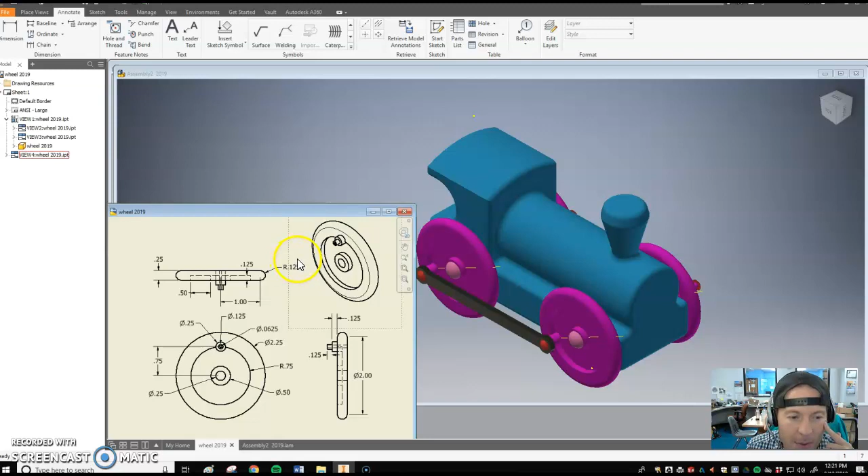So to start off with, if we're looking to build this wheel, we're going to build a new part file. So new, IPT, here we are. Let me slide this over so we can see everything.

All right, the key to this build is we're actually going to build it with a revolution, which we haven't used yet so far. The reason we want to build it with a revolution is to get this nice curved shape - it could potentially be done with a fillet, but it's going to be a lot easier to just build this profile right here, and then we're going to revolve it 360 degrees to make the entire wheel shape.

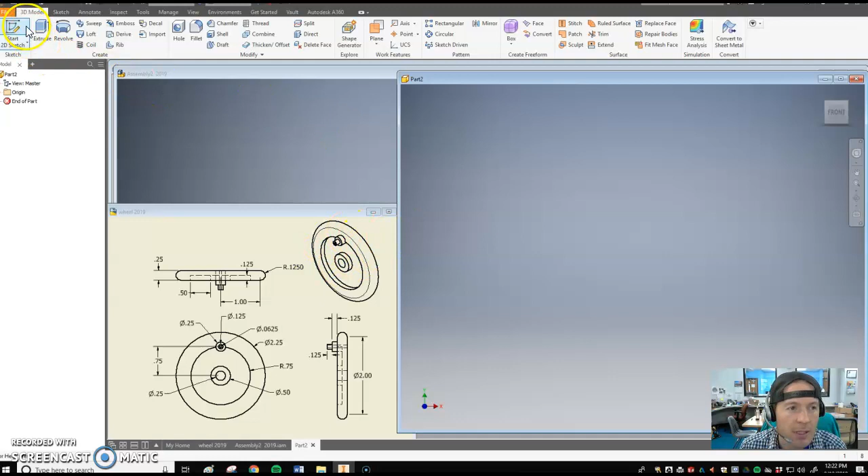So let's dive in. So we're going to start a sketch. It doesn't matter which plane you choose. I'm just choosing one randomly.

So to start off with, I'm building this profile here. Let me throw a rectangle on. Any rectangle - I want to make sure I don't accidentally lock it to anything. That rectangle is just fine.

Now, as I'm building this profile, see there's this little rectangle inside there, so I'm going to start that rectangle, something like that. Of course, we'll throw some dimensions here in a second.

We also have this arc out here, so let me throw that arc on there. With our arc tool, remember you go corner, corner, and something like that. There's the general profile of that.

Now let's start to get some dimensions on here and make this kind of how we want it. To start off with, I see from the center to kind of the top of where that rectangle goes, it's about 1 inch. So let me throw 1 inch on there.

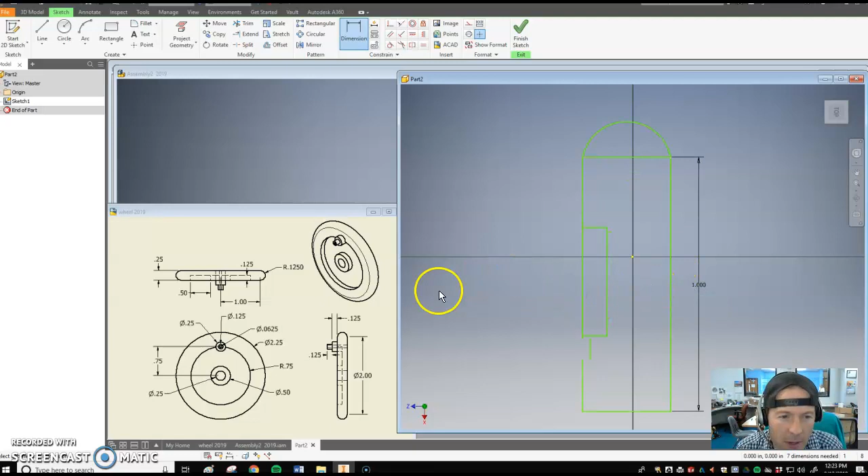Great. Next, as I look over here, I see - where is it? I'm looking at this distance right here. From there to there, it tells me is 0.125 inches. So I'm going to go ahead and throw that in right here. 0.125. So there's that indentation.

Next, as I look over here, I see that there's kind of this cutout here. That's this section here. This dimension tells me that's 1/2 inch. So I'm going to put this dimension to 1/2 inch, 0.5.

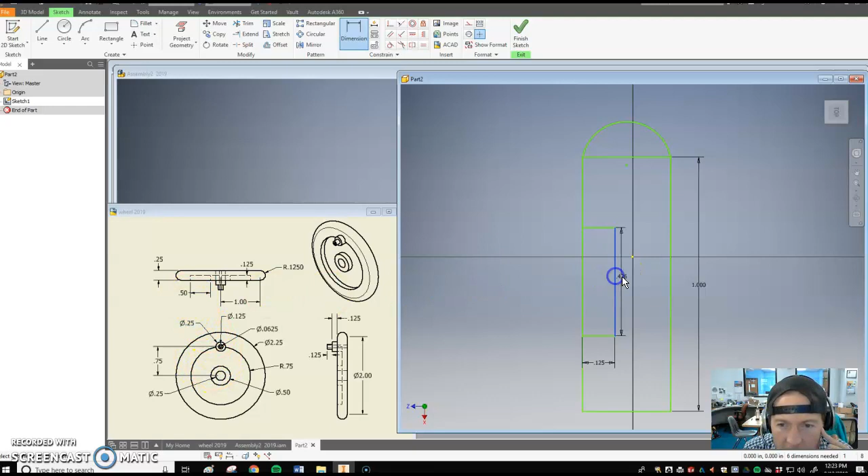All right, starting to look like our profile here. Next, let's figure out what we need this to be. So I look back over here, and here I see that this radius is 0.125. So I'm going to grab this radius, 0.125. All right, that's good.

Next, I want to look at this. How wide does this whole thing need to be? Looking over here, I see the wheel needs to be 1/4 inch. So let me grab this and set that to 1/4 inch.

All right, we've got most of our dimensions. Looks like I just need this one and this one. Let me see if I can figure this out. I'm trying to figure out how far this part needs to be right here. I'm going over here - so it's this outer circle that we're building right there.

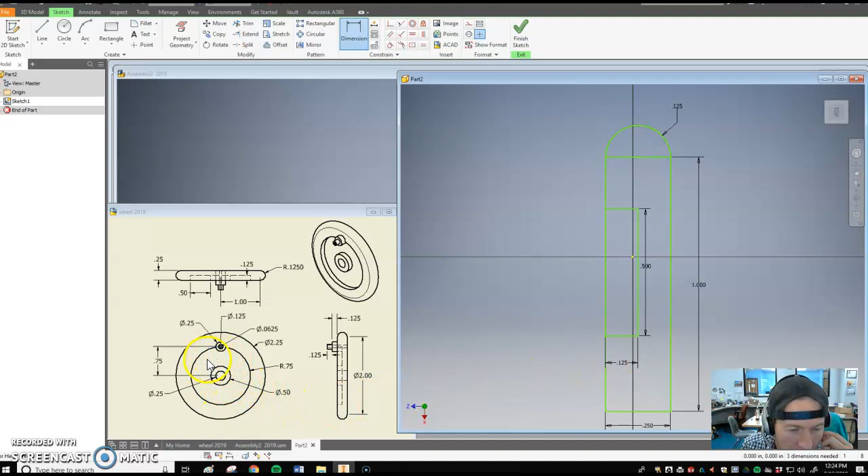Here I see it has a diameter of 1/2 inch. And so if it has a diameter of 1/2 inch, and this is the radius because we're about to revolve this, I need to make this 1/4 inch. So let me grab from here to here. I'm going to change this to be 1/4 inch, 0.25.

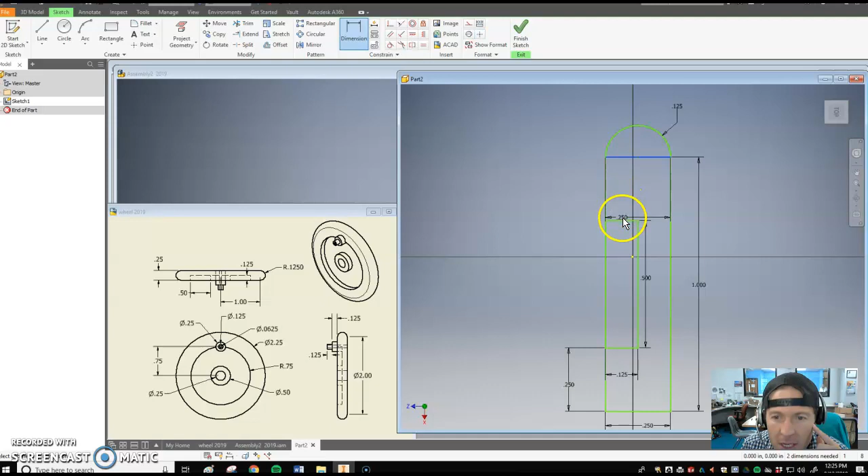And now if this whole thing is 1 inch, this is 1/4 inch, this is 1/2 inch, well then this also needs to be 1/4 inch. And just to make sure everything's right, I'm going to double check that. Okay, here it gave me this message saying it's already 0.25. All right, so here's our profile. We can cut this out, or I think we can cut this out.

It doesn't want me to cut it out. That's fine, we can still revolve it with that in here. Let me finish the sketch. We're going to go up to revolve in our 3D model.

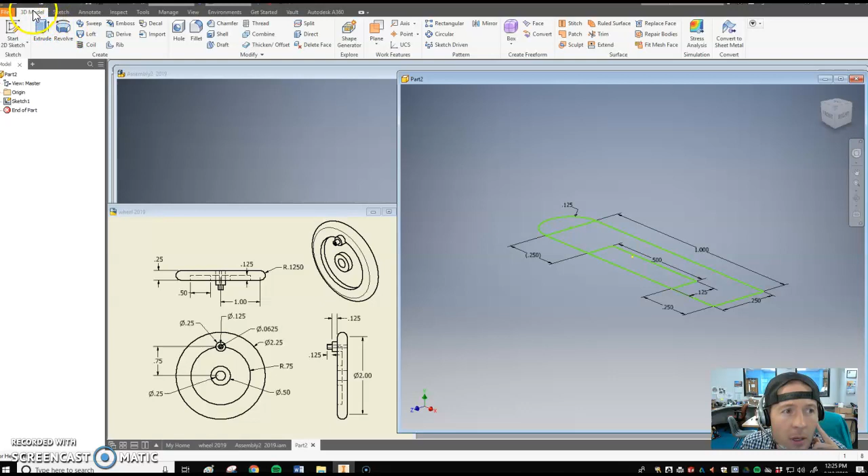Revolve. Select the profile you want. I want this whole profile, that's everything I want selected. Now I have to tell it what axis to revolve around, so I select axis, and we want to revolve it here. This is the center. There's my preview, that looks like I want it to. I'm going to hit OK.

We can pull in the view cube and get a nice look at it. That's the start of this piece here. Next, let's focus on putting a hole right in the center. So that's this hole right here. I can see it doesn't come out, it's just this hole here. And that hole looks to have a diameter of 0.25.

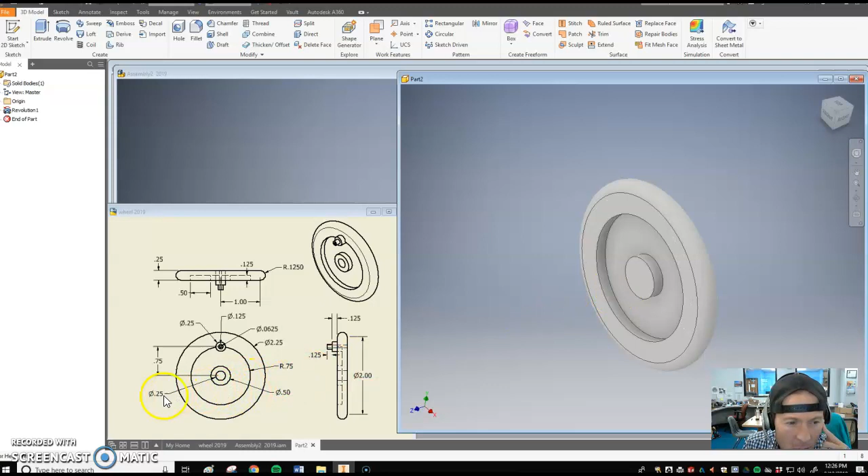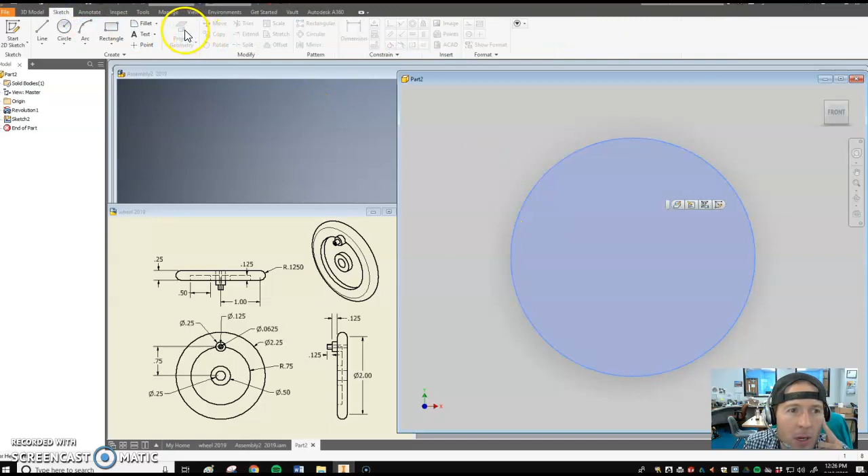So let's throw this hole in here, and we get a nice front view. To do this, we're going to build a point there. It moved me over, so I just pushed on the wheel and dragged it back. I'm going to throw a sketch right here. Now I want to know the exact center point. To get the exact center point, we can use this tool called Project Geometry. Okay, now we're in a sketch.

Now I'm going to use Project Geometry and click on the circle. Notice it highlights that point for me. So I'm going to grab the point tool and make that point. That's all we need to do for the sketch. Now let me go to 3D model and tell it we need a hole right there.

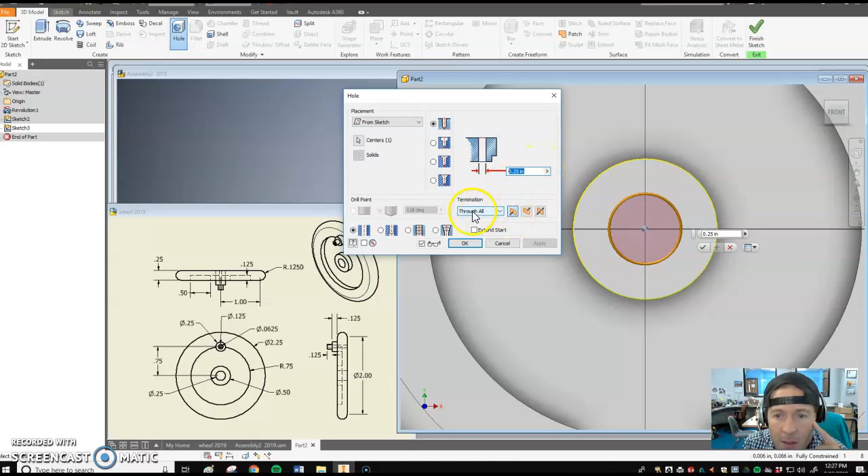So a second ago we said we wanted this hole to have a diameter of 0.25. So let's type that in - oh great, it's already set. I want it to go all the way through our wheel, so that's okay. All right, let's zoom out and see how things are looking.

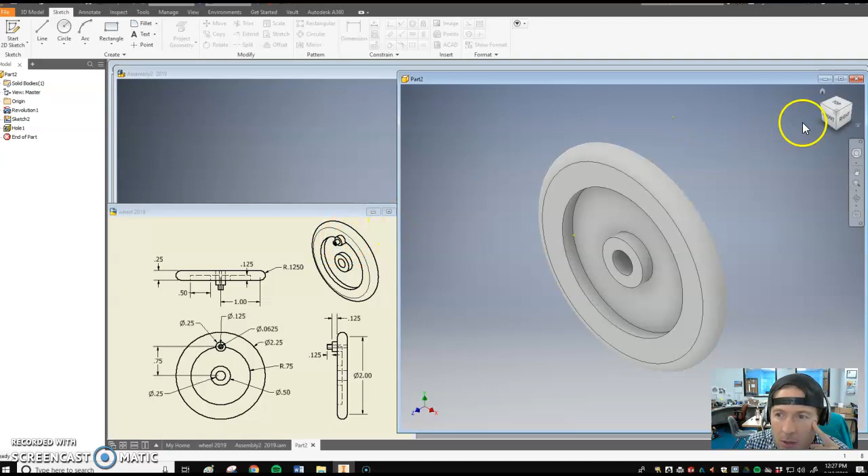Great, so now we see we have our full wheel. Let me go back to a nice view just by clicking the home button here. Next, I want to focus on this peg out here, that's where our linkage arm is going to attach to. So let me get a nice front view and zoom in a little bit. I want to throw this section right up here, so let's start another sketch.

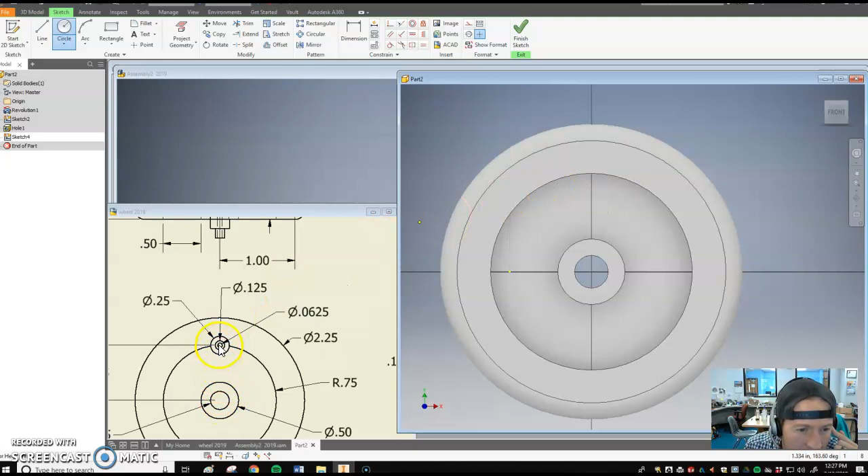Select our surface, we want it right here. Circle. Now as I look down here, we see that the center of this new circle is 0.75 from the center here. So I want to build this right here, and I'm just going to pull it out. We'll set some dimensions here in a second. As I look down here, I see the diameter of this piece looks to be 0.25.

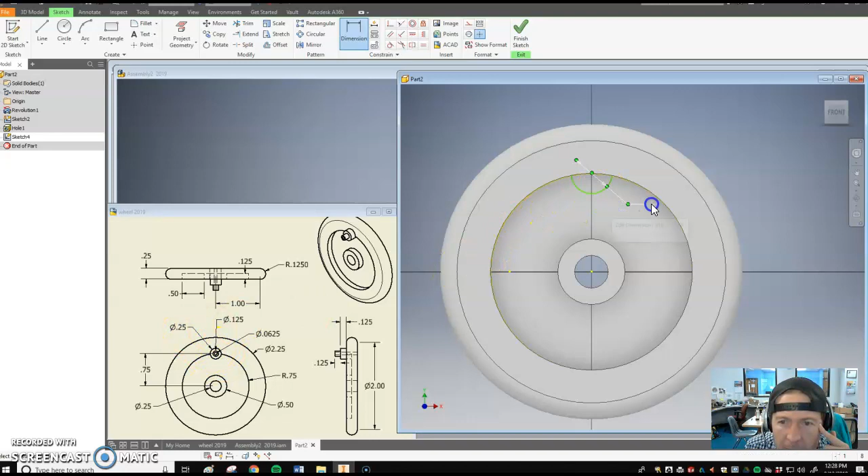So let me just set that 0.25. All right, we have that one. Next, I want to make sure my distance from center to center is 0.75. So I'm going to slightly pull the cube up so I can see that center point. Let me grab my dimension tool and measure. Right here, I went to grab the middle here, but it wasn't showing that to me.

So I'm going to go Project Geometry, click this circle, which kind of activates it, and back into dimension. Go from there to there. Okay, perfect, it says it was already there - that's exactly what we wanted. So we have that distance right.

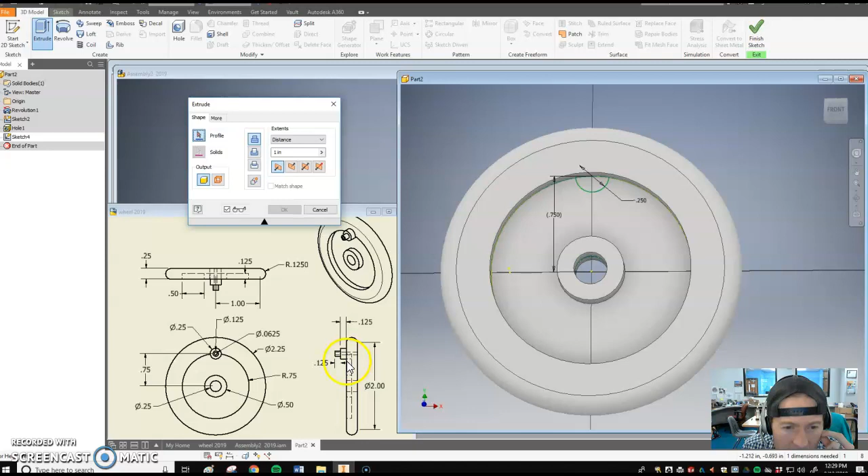We have this, now we're ready to extrude this to give it some depth. So I can go up and extrude it. Now I need to come down here and see how far we want this extruded. It is on the back plane right here, right here on that surface. So from here to here is an eighth of an inch, and there's another eighth of an inch, so in total that extrusion is a quarter of an inch. Let me change this.

Oh, I need to tell it the profile. I'll select the profile we want. Oh, I don't want that whole thing, I just want this circle there. Back and extrude, I want it to go a quarter of an inch. Select that circle - that looks great. So there's the start of that.

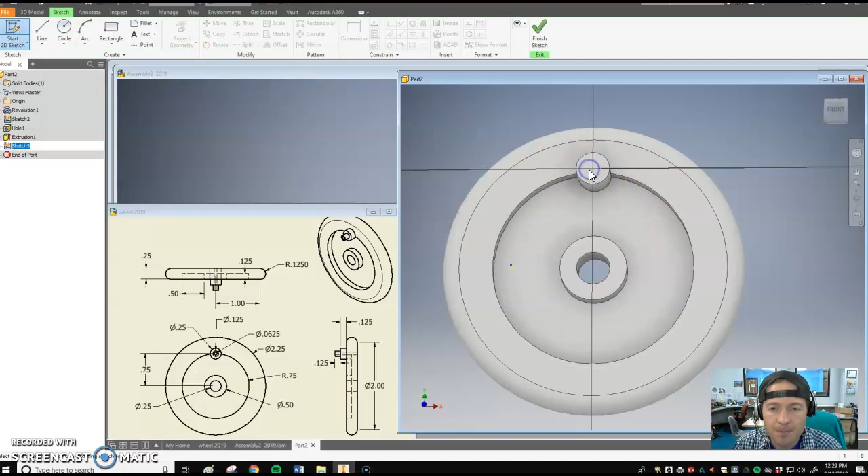Now we want to throw another little knob here that the linkage arm is actually going to go around. So I'm going to do the same thing - throw one more, this pin right there. To do this, start another sketch. I want it right here, let me center that for you guys. All right, so I want to throw a circle right in the middle of this.

That's fine. Now let's figure out our dimensions. As I come over here and look at this pin, this itty bitty pin right here looks like it has a diameter of 1/8 of an inch. So let me set that to 1/8 of an inch, or 0.125.

Great, okay, that's fine. So I can finish sketch, or you can go right into the 3D model since that's what I'm going. The computer will let you do it either way.

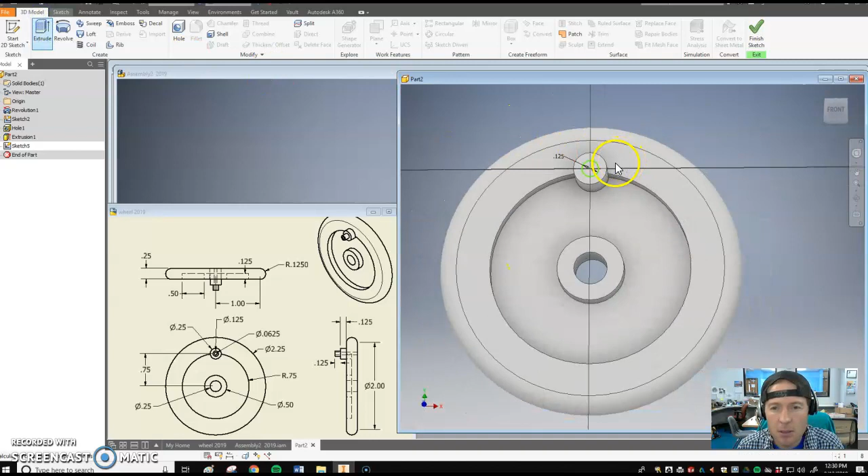Let me extrude this, and I'm going to come down here. I'm going to notice that right here, that has a height of 0.125. So let me change that to 0.125. Great, okay, that's looking as we need it to.

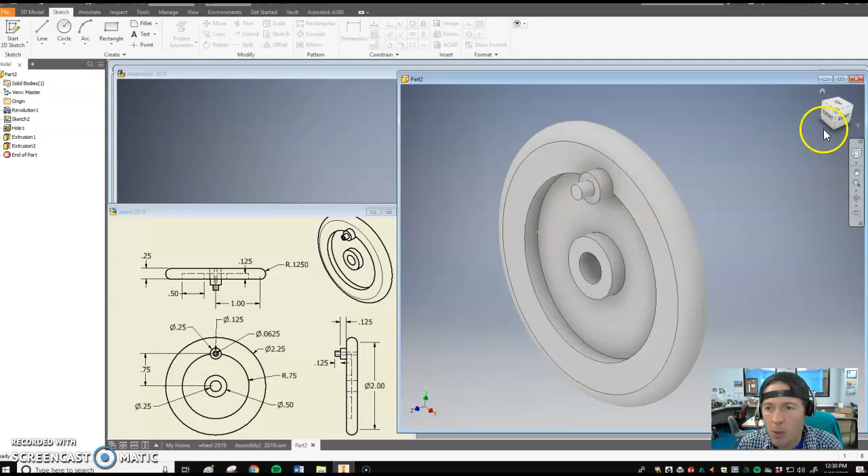Now we're just going to put a hole here so we can put a peg through there. Let me zoom in slightly. I'm just going to throw a hole right in the center of that.

We'll start another sketch. Let me pull it back over here for you guys. So we want a hole right in the center. Now, because I lined mine up, it's right there for me. If yours isn't going to show, go ahead and do this Project Geometry.

This is what allows the computer to activate things or show us. Notice when I click that, it showed me the center. I'm going to make a point here, right there in the center. Notice it turns green, so that point is set. Now we're just going to put a hole there.

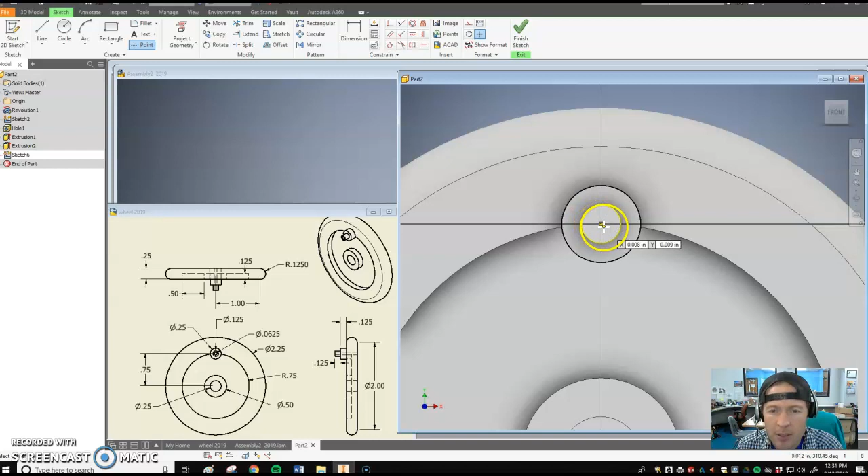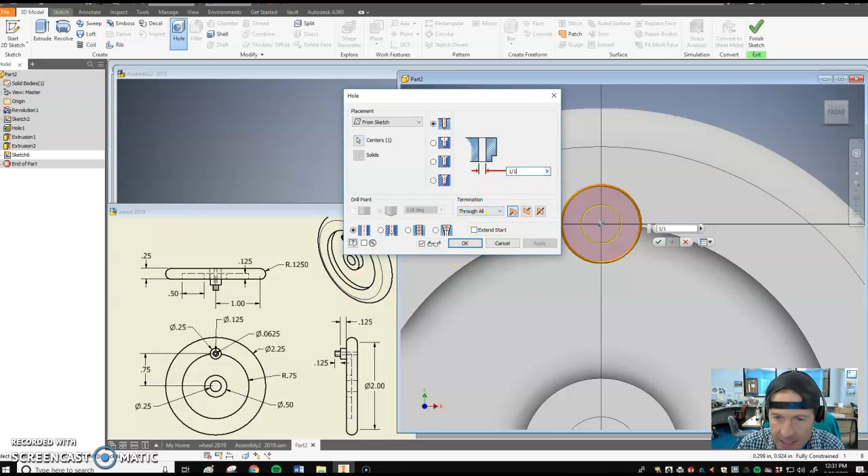Let me go into 3D model. We're going to build a hole since I have that activated. Now the hole is way too big. Let me go all the way over here and notice that itty bitty hole there, that's its diameter. So that's a diameter of 1/16. So I'm going to just go over here and type in 1/16, or you could type that number in as well.

Okay great, so let me zoom out, have a look at this. That's looking like a pretty good wheel. So now we're almost done. We've built the whole wheel. The last step is we need this axis so that we can end up making these wheels all work together here when we do our assembly.

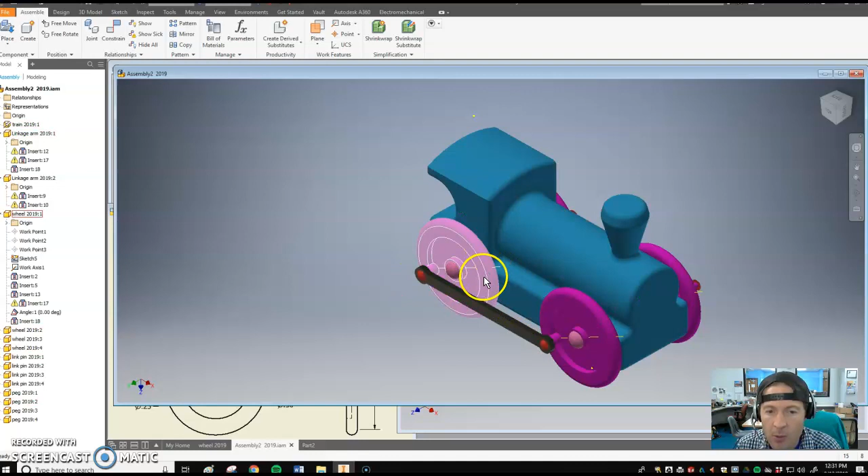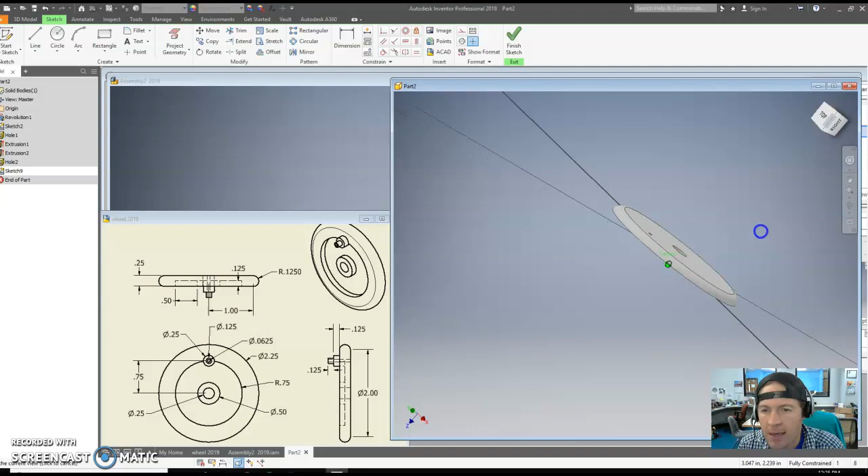So let me go back over here to our part. Alright, so here to build this axis through here, I'm going to start a new sketch. Select this surface. Now outside of it, I right-clicked and I'm going to select Slice Graphics. The Slice Graphics kind of shows us this inside view of if we cut it in half, that's right through the center there.

Okay, and our goal is to create an axis that goes right through the center. So let me zoom in slightly. What I want to do is make a point in the center of this circle, a point in the center of that circle, so that I can connect them to have that axis. So I'm going to use project geometry to tell the computer I want it to tell me the center of that circle. See that point comes there, and same thing there.

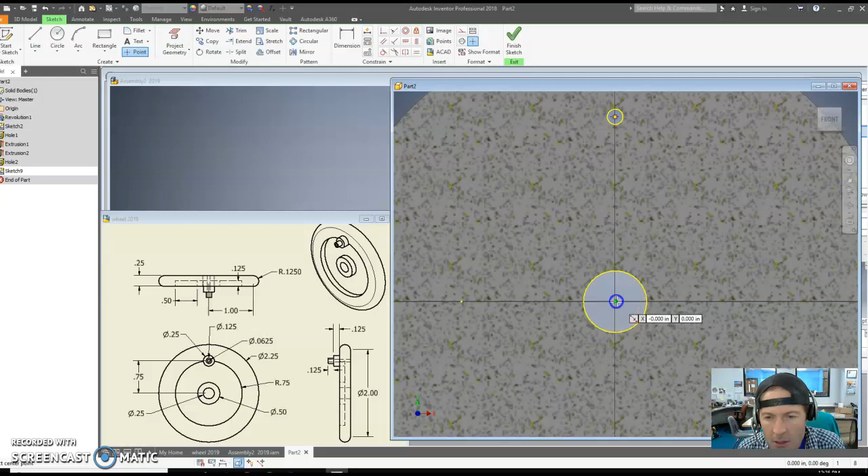Now I'm going to go grab my point tool, put a point there, notice it turns green, click, notice it turns green, click again. Alright, now there's 2 points in there. That's great, that's all we need for that sketch. So finish sketch, and now we just need to throw this axis in.

To throw the axis in, we're here in 3D model. There's this axis right here. Now I'm going to use this drop down, and as you guys get more and more advanced in the software, these drop down menus start to be more helpful.

So I'm going to go axis through 2 points. I want to connect those 2 points. Now watch out, don't just click right here, you might accidentally get the very front of the circle. I'm going to tilt my view cube slightly. Notice there's that green one at the front, and then there's this point we just made.

It's actually on the inside. It's perfectly in the center. Those are the points we want, not anything on the front, not anything on the back. We want this point there.

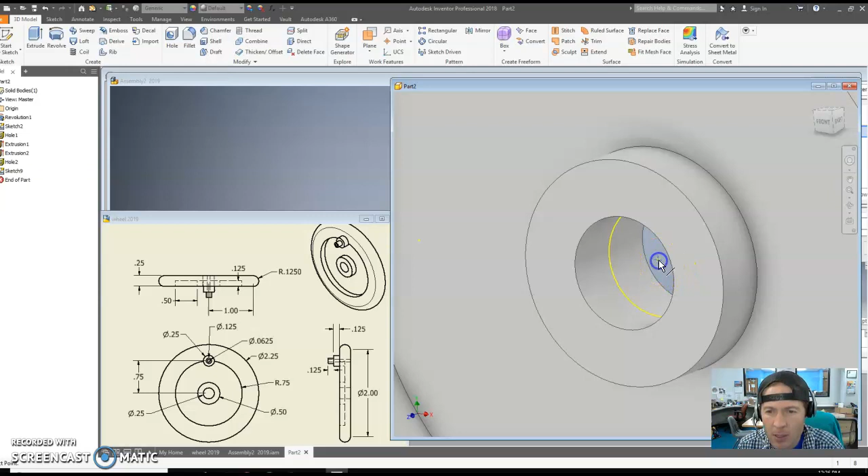Now I'm going to zoom out slightly. I'm going to pull it up, and now I need to go find that point I have right inside of there. Notice, alright, there's that point. Click. So now if I've done this right, that axis is perfectly through the center.

It's not skewed off any way. The wheel's symmetrical on both sides. Great, that's exactly what we're looking for.

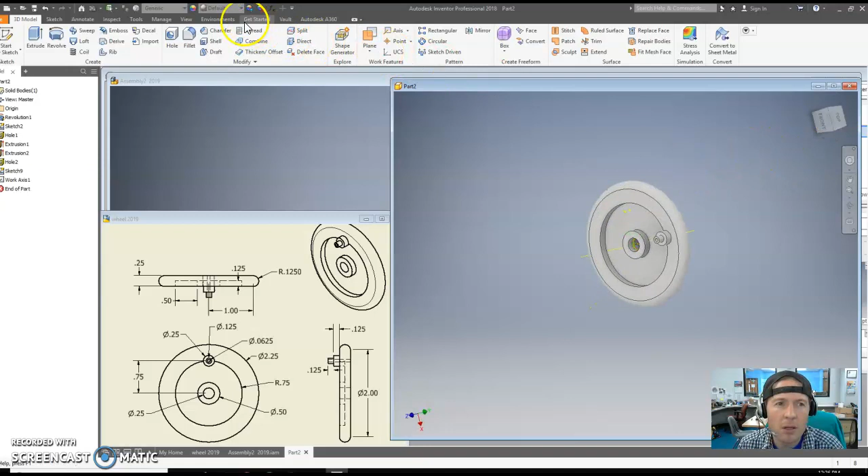Last step, go ahead and choose whatever color you like here in the color menu, and then you have your wheel, and you can move on to the next step. Let's go red.